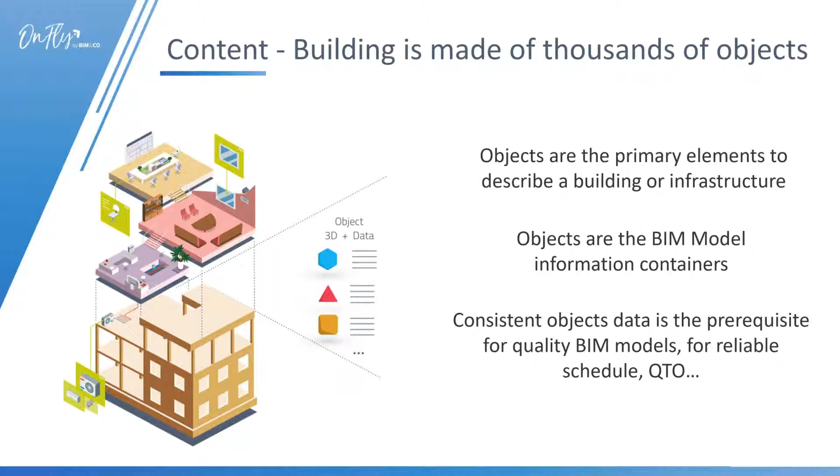But to use artificial intelligence, to have intelligent models, first, the input data must be readable, must be clean, and must be managed. So this is why for us, objects are really important, because they are really the inputs of the data of your models that will go through the life of your project. And this data is important because after, it's used to take out the schedule of your project, to have quantity takeoff, estimation, and so on. So within your company BIM implementation plan, it's important to talk about content. And basically, we have 2 steps of this implementation roadmap concerning BIM content.

First is to develop a BIM library. And most of you are already on this path, so this is great. In the questionnaire we sent prior to the webinar, many of you confirmed that you already have a BIM library. Most of you are stored on a server or maybe SharePoint. So it's important to have specific tools to manage this library, to help you to save time in design, but also to collaborate across offices, etc.

Then the second step is when the need arises to standardize your content, when you need to control it more efficiently, when you need to classify more efficiently, when you need your content to be useful for different disciplines across different markets, and when you want your objects to have structured data and defined data for different types of objects. For example, a valve will not have the same data as an air handling unit. So all of this represents your BIM library. An example of one of our customers having 2,000 objects through 5 different formats: Revit, Civil 3D, SketchUp, and so on, using 2 classifications.

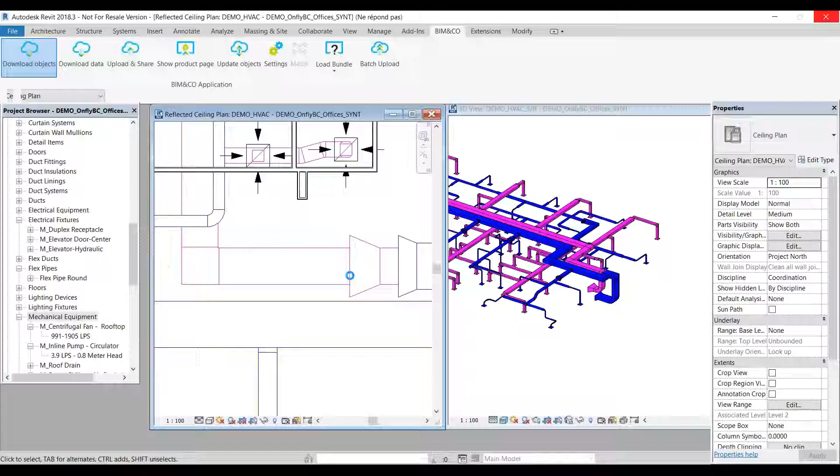Okay. So we see here that we go back to the same environment we were in in the web browser. We're going to select a generic object, which is a generic air unit. What's important also to mention is that our technology considers the geometry separately from the data, which is really important because according to the phase or to the level of your project, you might not need all the set of information or parameters that you have in your object.

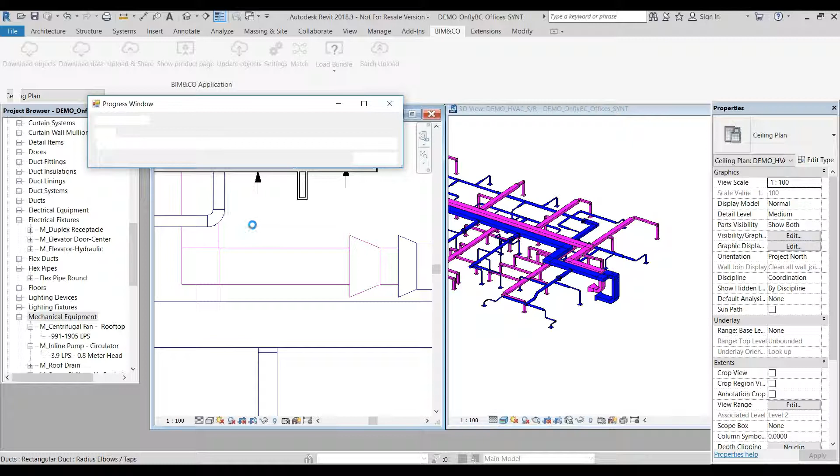So the fact that you can control or select specific parameters according to the stage you are in is very important, and this is really the focus that we put on our process. So for instance, we are in this case looking for classification, identity data, and dimensions only. We don't need electrical for some reason, so we can only select the parameters we need. We select the reference we need, and we download the object. So straight away, the system will bring the object with only the parameters that have been selected.

Okay, so we see now the air unit. Cool. So here is our air unit that we selected. It's the generic object with a specific set of parameters. So now we will see how we can integrate more information or a specific set of properties. For instance, it could be COBie or any specific customer's properties that you need to integrate. So we go back to the plugin, but this time we will only download data. Okay, so now we have the data insertion mode.

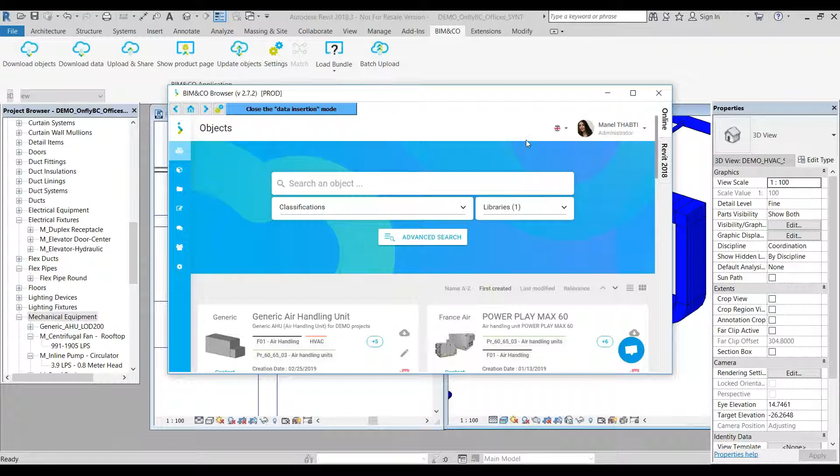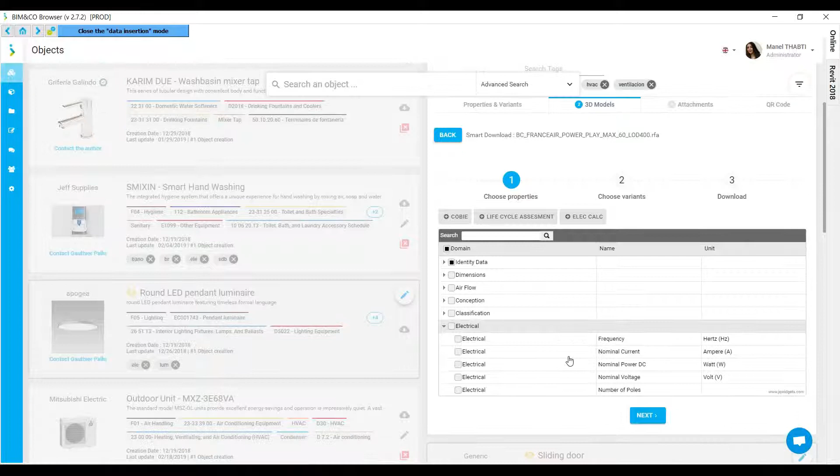We'll pick this manufacturer object, which is an air unit with more parameters. Sorry, this is not what I wanted to do. I will select, just as an example, some electrical properties. Yeah, in here we have the frequency, the nominal current, and so on. So I'm going to get this set of parameters, select the variant, the references, and download. Cool.

So in here we see that the electrical parameters have been integrated. Sorry, I didn't show you at the beginning what parameters we had in the object, but basically we had only dimensions, classification, and identity data. So as an example, let's take another set of properties to see. Let me just check in here what we have.

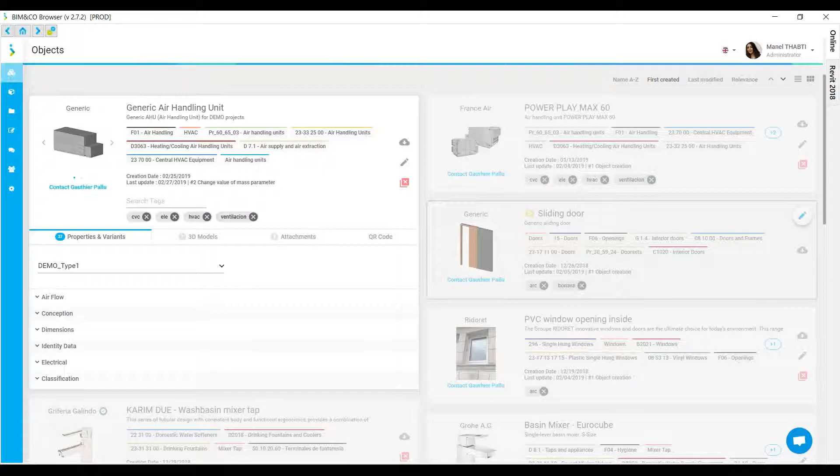Let's take airflow parameters to our objects, just to show you. So in here we don't have the airflow parameters.

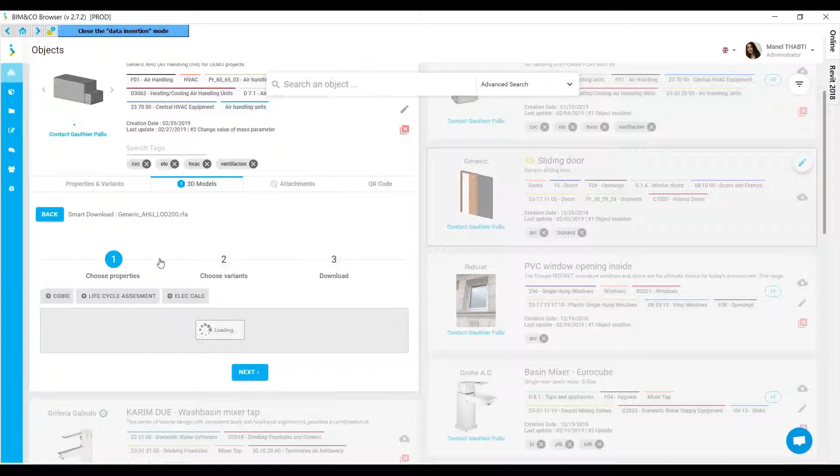We're gonna integrate them, so let's download data again. In here we're gonna use the smart download, which is smart by allowing us to integrate only the parameters we need to our object. So in this case, all the airflow parameters will be selected. Proceed and download.

Let's see together now if our parameters have been integrated. Yes, mechanical flow, airflow max, airflow minimum, pressure drop, and so on. So the 4 parameters that we had in here, that were mapped with value, are retrieved in our objects online.

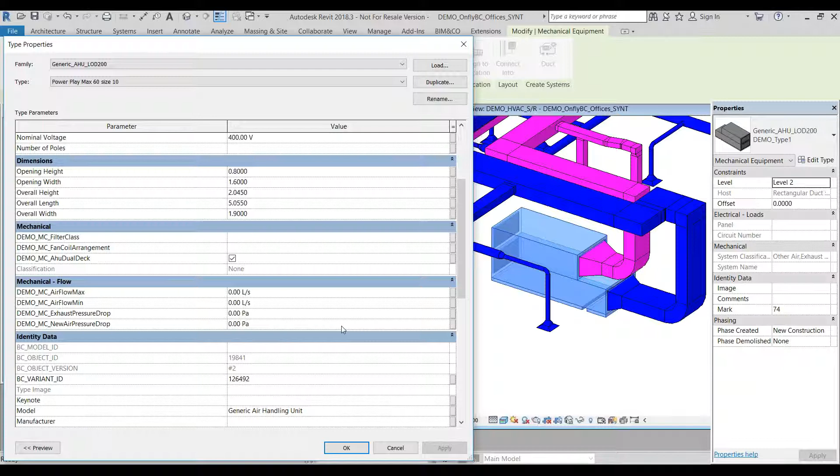What's important also to know is that we create and generate IFC parameters with the object parameters value. That will help exchange your model. This is generated automatically as well.

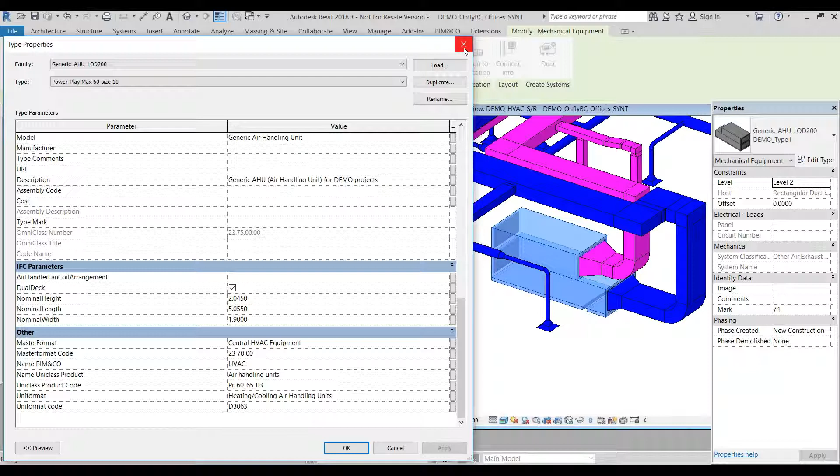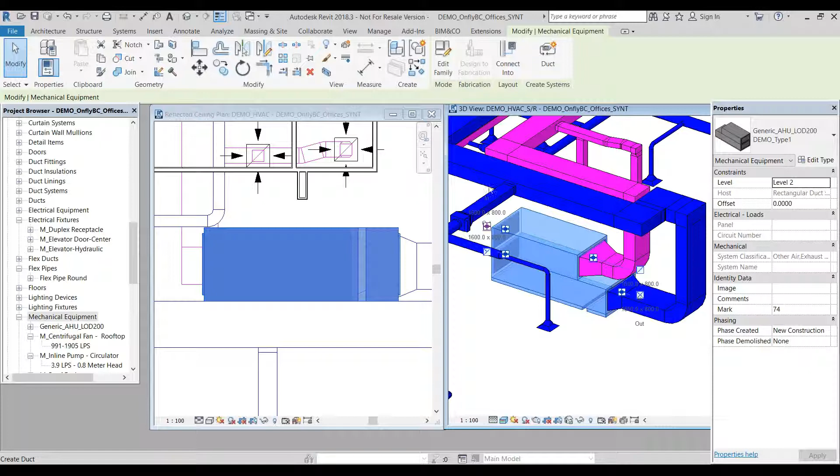As I said earlier, there is a dynamic link between all the modifications that occur on the platform. So if any object or parameter value is changed, you will be notified. If the subject will change over time, you will be notified and through the update objects get all the updates that let you know what parameters and what change has been done on your selected objects. I think I'm done from my side.

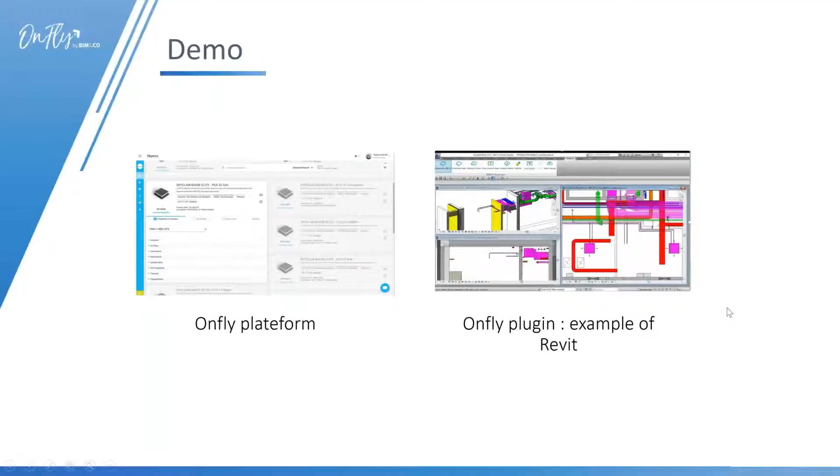Thank you a lot. So going back to the presentation. From what we have seen with the features of Onfly, if we put it in a case of use case, it's something like that.

The objective would be to enrich your model with additional data, up to delivering an updated model or ideally an as-built model. So generic objects are inserted in the model.

Then on the platform or in Revit, additional parameters or new values of these parameters are updated. Can be manufacturer data if we're building an as-built model, or more precise data if it's an updated model. You can also ask a manufacturer to directly provide you with the data through Onfly. Objective of this use case is to have the model updated with more precise information.

Another use case is a collaboration between Revit and non-Revit users. So you have a modeler using Revit who has different objects that have been inserted in the project.

Then on the platform, you can have the HVAC engineer that will check and update all the values of the parameters that were inserted in the model. This helps the specification of equipment and does not require Revit. It can just be through inserting data in the object.

Then the project modeler is notified that updates are available and he can update the parameters.

So to wrap up, Onfly will help you centralize your BIM library at the company level. It will help you control the families themselves, the data inside the families, and the geometry. It will also help you implement the standards so to harmonize your library.

And the final goal is to better design, more quickly, more effectively, with controlled content. And at the end of the day, to better collaborate, specifically between the fields of engineering that are involved on the project.